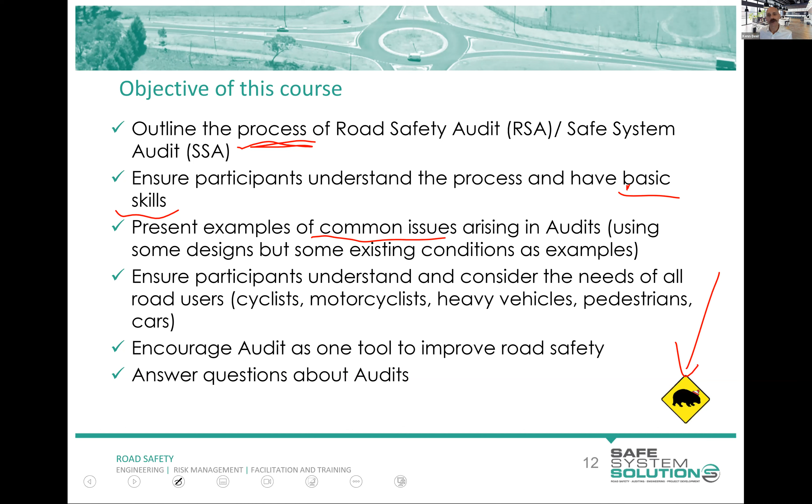Okay, if you are slightly confused about what's going on in New Zealand associated with road safety audit and safe system assessment, I don't blame you. It is a transition phase, as Kathy mentioned. We are seeing a whole lot of new stuff coming online, people still doing old road safety audits, some jumping into safe system audits, some doing safe system assessments - we've got a whole lot of different things going on.

Let me explain this diagram to start. Austroads, and many of you know Austroads, is the body which has all of the different road authorities from Australia and New Zealand as members, or the state and national road authorities, and tries to incorporate local government as well. Austroads has the Austroads Guide to Road Safety, and part 6 of that is road safety audit.

Now, I was technical advisor to Austroads on that document, and lots of people worked on it. It was updated and released in 2022.

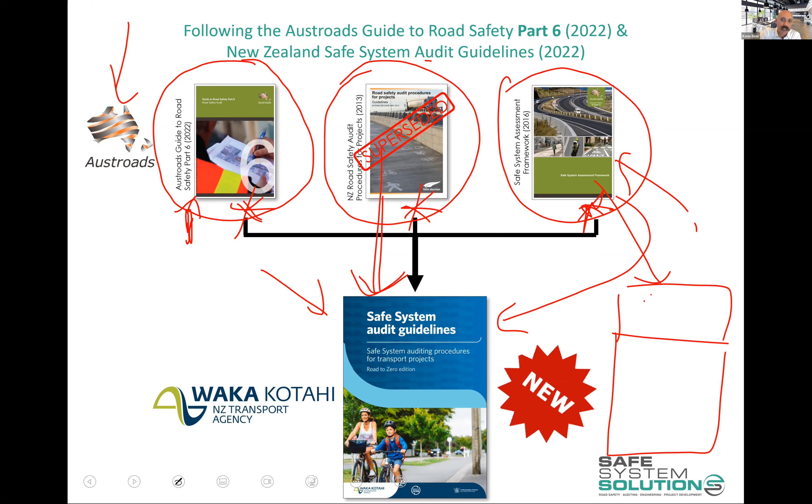Now, that may have clarified things, or it might have made things less clear for you. But what I will be taking you through is the process set out in the Safe System Audit Guidelines. You will get to the end of this and you will be able to do a safe system audit, except you will probably need some more learning around the first aspect - the safe system assessment part - and then the road safety audit part.

You'll be absolutely clear on that audit part. You'll get a few insights on the assessment part too, but that one's probably where you'll need to do some more reading, or do the safe system assessment course, or have a go at it and learn over time, or partner up with somebody who has experience with that process.

So please put your questions in if you're still confused about that - I don't blame you. It is now the New Zealand process that you should be using the Safe System Audit Guidelines; you should be following that process. Waka Kotahi has put their hand up and said these are out, these are to be used, but we do want feedback on where it doesn't work and things we could possibly change. They do intend to release an updated version based on industry feedback.

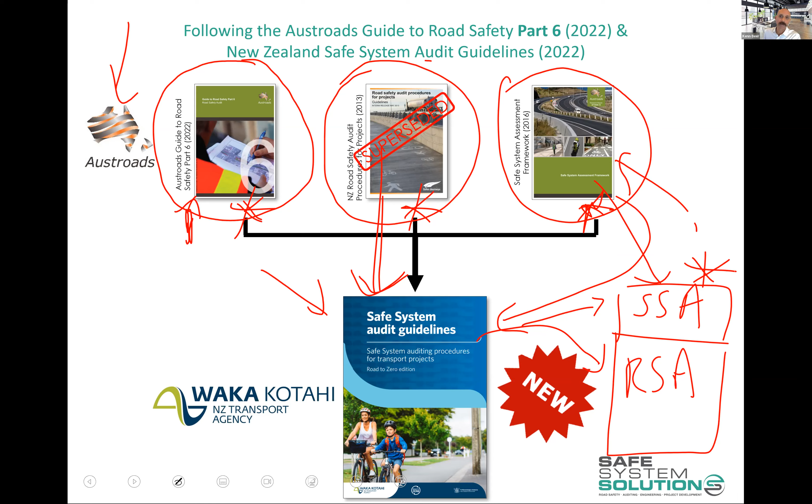Just quickly show this diagram, which is out of the Austroads Guide to Road Safety Part 6. This is just context setting, so don't get overly concerned about the complexities here. We have safety visions of a road network, and things like safe system principles, movement and place or one network framework stuff, general speed zoning and road stereotypes and the like.

Then we sort of have proactive treatments and reactive treatments or techniques. Road safety audit fits in that proactive technique section. So what we mean by proactive is we don't need to wait for crashes to happen to identify risk on the road network, or in a design, or something that's about to be built.

We can use our knowledge to identify risks before people are killed or seriously injured and try to get those out of the road system or out of the design so they're never built in the first place. Reactive treatments happen when crashes have already occurred. With a crash reduction study or black spot study, you've got a lot of crashes at a location, you analyze them in detail looking for patterns, and then look for treatments. These are different processes - one predicts crashes, the other looks at crashes that have already happened.

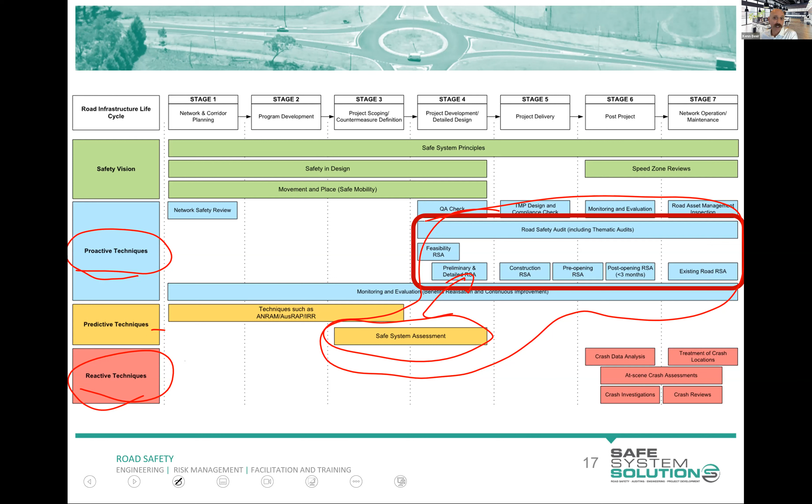I want to stress this point: a road safety audit is not a way you go and look at an area with a lot of crashes - that's a crash reduction study or black spot investigation. A road safety audit is slightly different. The biggest misconception is that because it's called an 'audit', people think it's a rigorous compliance check against standards. That is not what a road safety audit is.

Standards, guidelines and documented processes are a good starting point for any road design or upgrade, absolutely - they have a lot of thinking and safety embedded in them. But simply following standards does not guarantee safety. There are roads out there built to standard where people have been killed and seriously injured. That could be because the standard of the time had risk built into it, because the combination of standards working together creates an unsafe scenario - in isolation they might be okay, but combined they don't work - or because the specific context of the area was never considered when the standard was developed.

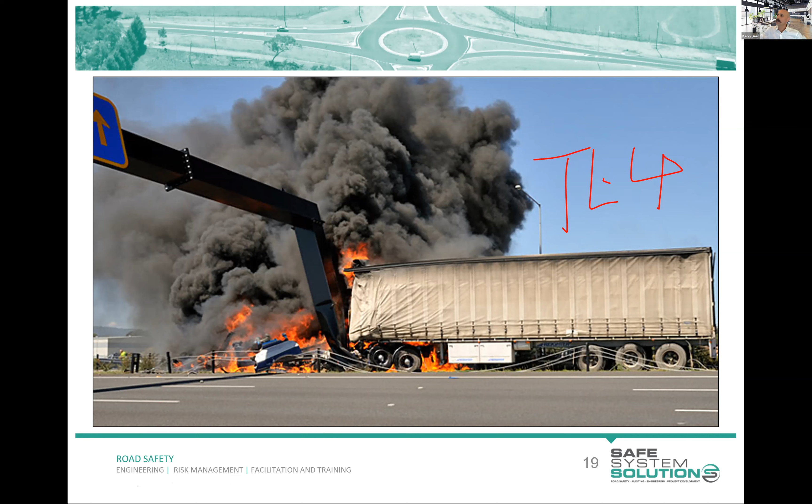The question is: can you show an example where standards have been followed that led to unsafe results? Yep, I've got a couple I'm going through - this is one. As we get a few answers in, there are times when following standards actually increases risk in that context.

This one I wouldn't say increases risk. It's just not doing the job that it could be doing. It's not as effective as it could be. Those standards are just not effective. And the result has come through.

Pretty much a brand new, multi-billion-dollar road has opened, and then somebody's killed fairly recently after it opens. Imagine if that was a rail line and it opened, and within a few months somebody was killed - the line would be shut down, and there would be major overhauls in safety. But that's sort of not necessarily how we look at roads at this stage. We're trying to change that.

Right, do we have any guesses? We had everything from about 2 tons up to about 10 ton. Well, whoever said 10 ton, they can have a prize. I'm tempted to give 8 tons a prize as well. Let's give out 2 prizes.

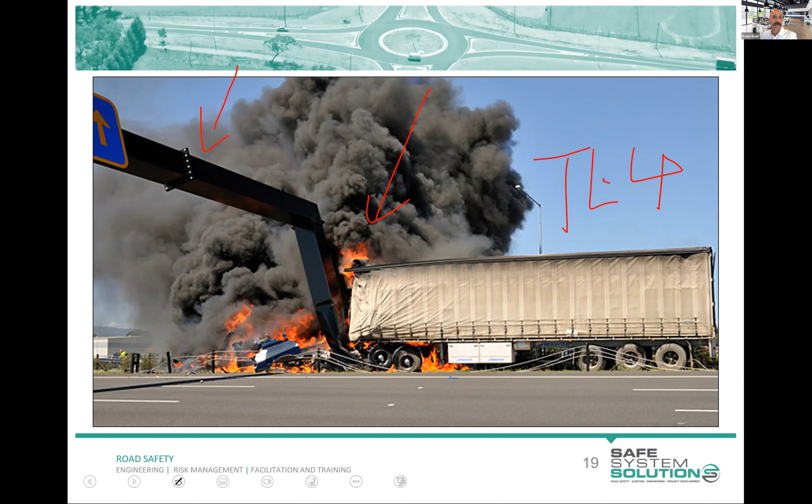So that's actually the vehicle, and that's the test. It's a 100 kilometers per hour, 25-degree impact. And that's what it would contain. So we're giving out a couple of prizes there.

Any other questions at this stage, Kathy? Tell us about the crash angle.

Well, there's some simple physics around the energy of a crash, and the test protocol, as I said, there is either 25 degrees or 20 degrees angle crashes. And your energy that will be imparted on the barrier system is the product of the weight, the speed, and the angle. Those are set, and then you crash the vehicle. So again, if you've got a barrier system and you predict vehicles will hit it at angles far greater than 25 degrees, in a lot of the crash scenarios you're predicting, you might need to think about upping your test level or changing something else.

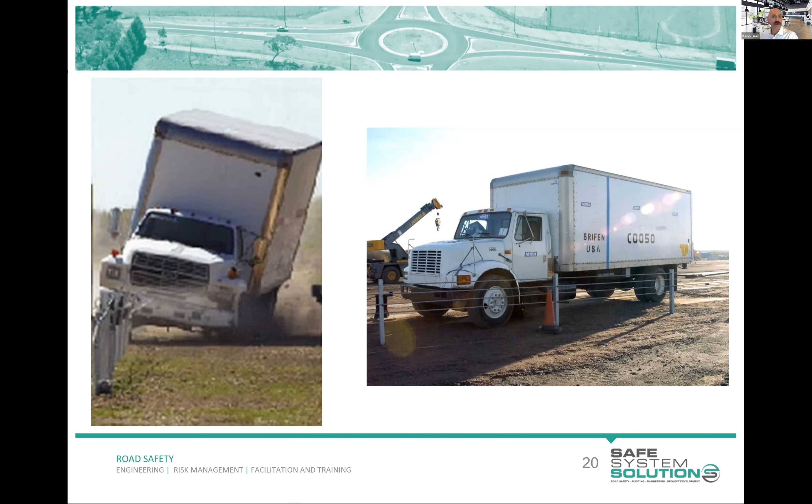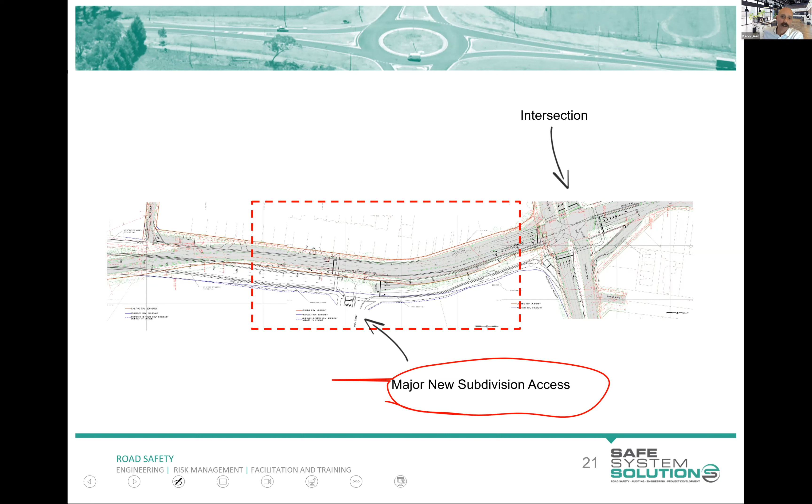That's a good point. Let me give another example of where standards are met and we still see some challenges. So this one is not an existing road, this is a design - I will zoom in on it in a sec. What we've got here is this major new subdivision happening down here, and this is massive stuff. It's got a shopping centre and hundreds and hundreds of apartments and other townhouses and cafes and the like. It's big. And so they are creating a new intersection here with traffic signals to access into this new development. And there's a duplication of this existing road happening as well.

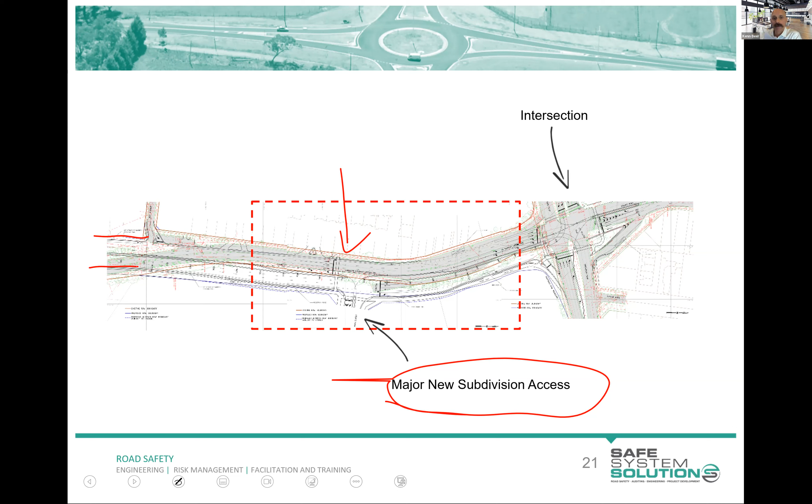So let's zoom in a bit here. And we're looking at, this is where the new access is, Main Street, they've labelled it there. Now I'll put a little red square up here, and this is a vehicle, okay? So we're imagining being in this vehicle, and we're travelling along at, it's a 60-kilometre speed zone, so maybe going 65 or something. And we travel along here, and oh, whoa, we're in a turn lane.

Okay, this is what we call a trap lane. Kathy, we should work out who named it a trap lane back in the day and give them a prize, because that's just beautiful naming of an issue, because it's exactly what you find yourself - you're trapped. And then we know, all right, we know absolutely that we will have rear end crashes and we will have side swipe crashes. And that's because the driver of this vehicle will realize this at some point, and then they will try to change lanes into other vehicles. They will not realize it, and then this vehicle will stop abruptly in front of them. And we know we have road safety challenges here.

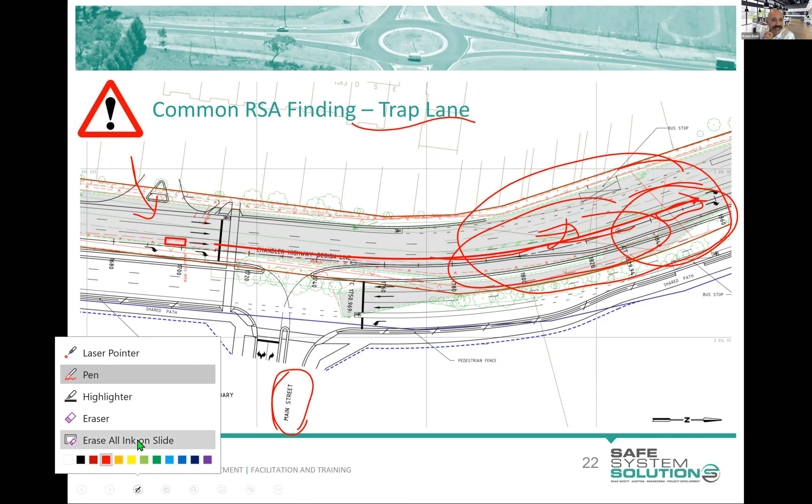Now, a trap lane is one of these interesting ones where it is discouraged in road design, but this meets standards, okay? So again, this is where we can be injecting and saying, hey, you're creating a trap lane, you plan to build a trap lane, this is going to cause trouble. And then giving them some ideas on how they can rectify this.

Now, as a road safety auditor, some of you are probably road designers or people who have been involved in this sort of stuff, and you know the challenges that are faced here. You don't need to know this site to know what they're probably dealing with. They're probably dealing with land acquisition challenges, services, potentially cultural heritage, environmental challenges, traffic flow modeling challenges, right? It is not easy to design and build something like this. You've got so many constraints on it.

As a road safety auditor, we have this luxury that we are only concerned about safety. That's what we're here to do, okay? And that's one of the reasons we don't let the designer undertake a road safety audit of their own job - it's one of the reasons. Because they've got too much going on, too much to think about, too many competing demands and challenges and things that they're trying to design in and out and think about. We come in, complete focus on safety, and present those issues that we think could present death or serious injury to our community. And then we try to help them a little bit with ways that they could lessen that.

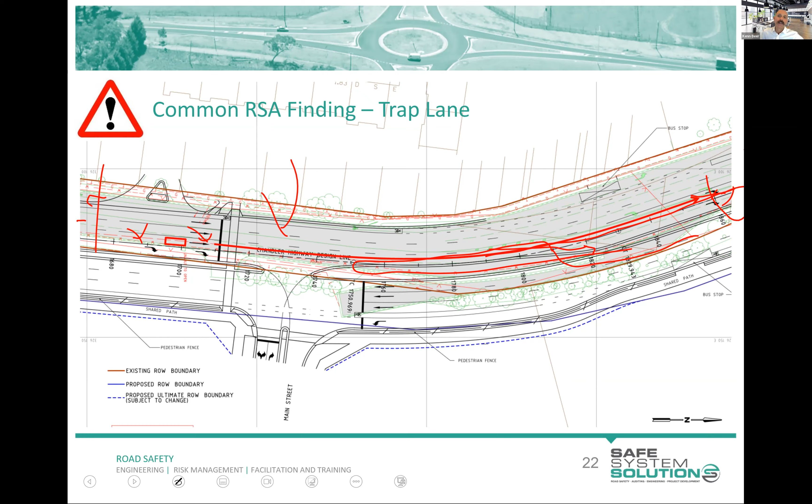I'm going to play this little video, and I might have to duck out of this screen and play another because I don't think my videos are playing in PowerPoint at the moment. Just checking if it does... no, it's not going to play. Okay, I'm going to stop sharing and share another screen.

Any other questions come up there, Kathy? No questions, Ken. I wish you did have legislative powers though, to get rid of that trap lane—that would have been good. Maybe next time.

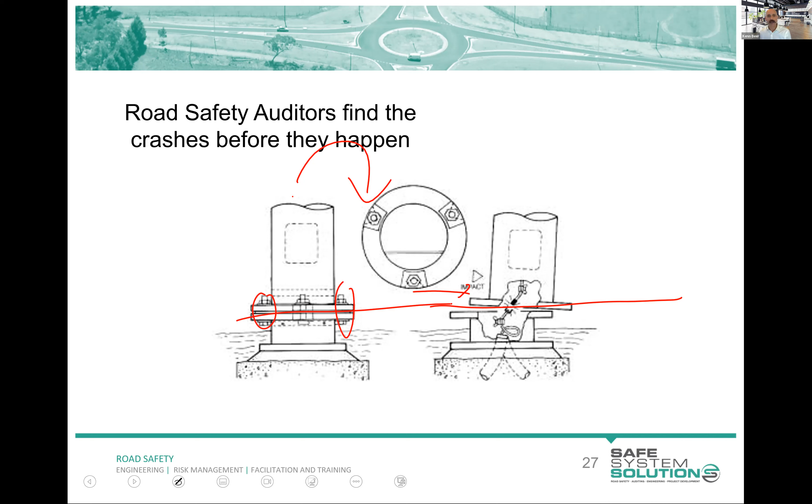A slip-base pole is an amazing bit of road safety engineering. For those who don't know it, essentially you have a collar and a shear plane on the bottom of the light pole. You can see when impacted from the side, it shears. When you've got your torque, the weight and the wind, it's going to lean on the bolts, but they'll shear off on impact. Just brilliant engineering.

Here's one up near New Plymouth. You can see that the speed of a vehicle must have hit this slip-base light pole to pierce through a reassurance sign. No injuries. So you could imagine if that was a rigid light pole, it would have destroyed the vehicle and the occupants. So that's slip-based.

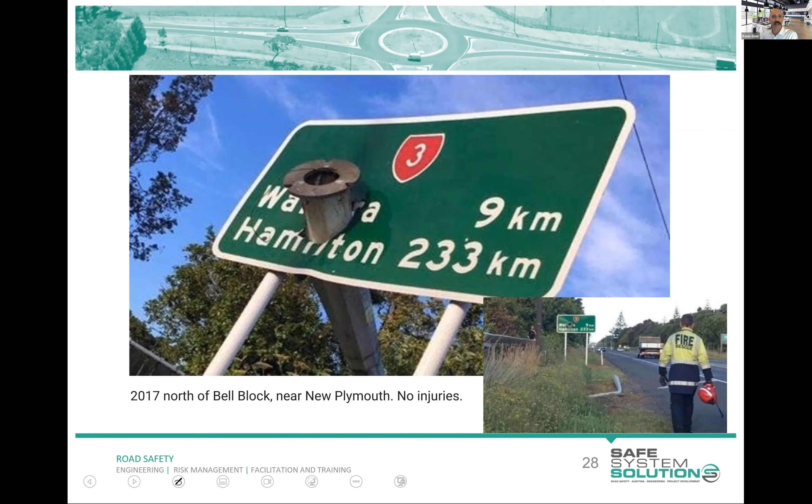There is another type, and I don't expect too many people to know this. I'll ask that question in a second. But as a road safety auditor, or a safe system auditor, you're going to be given things like this in amongst a big design set. Your job is to look at that, read through all the little bits and pieces, and say, okay, they're putting in new lighting, which means there'll be new light poles. What type of light poles are they using? Are they going to be slip-based? Are they going to be rigid? I'm worried about vehicles leaving the road and hitting those.

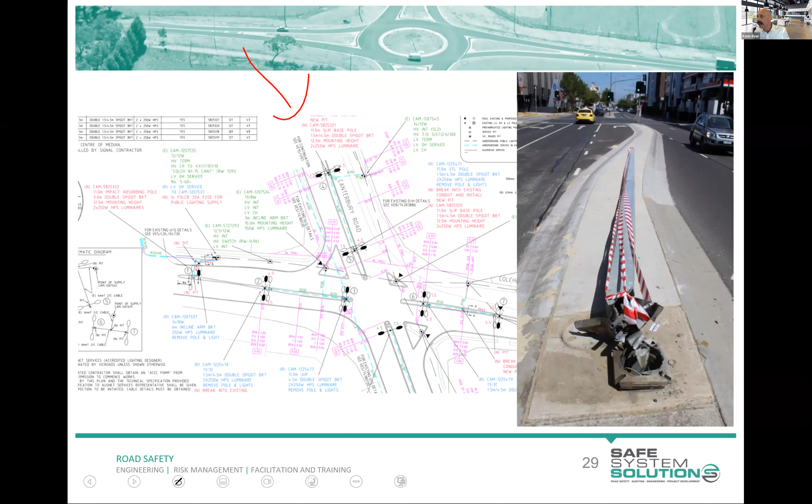Now let's have a look at this little bit of road environment. What if they decided to put slip-based poles at these locations? Is that a good idea? These ones all slip-based? We also need to think about where they may fall. We know these break away and fall. That's what they're designed to do.

But again, you need to contextualize this. This is where standards and guidelines tell you generally where to put these, but you can often meet standards by putting slip-based poles in or rigid poles in, and in context it becomes a danger. So there is another type of pole categorized as frangible, and I'll give a prize for this, but I don't expect anybody to come up with the answer because it's a bit specific. Does anybody know the other type of pole? I said slip-based poles, and then we've got rigid poles, which aren't designed to break away, they're just rigid. Anybody know the other one?

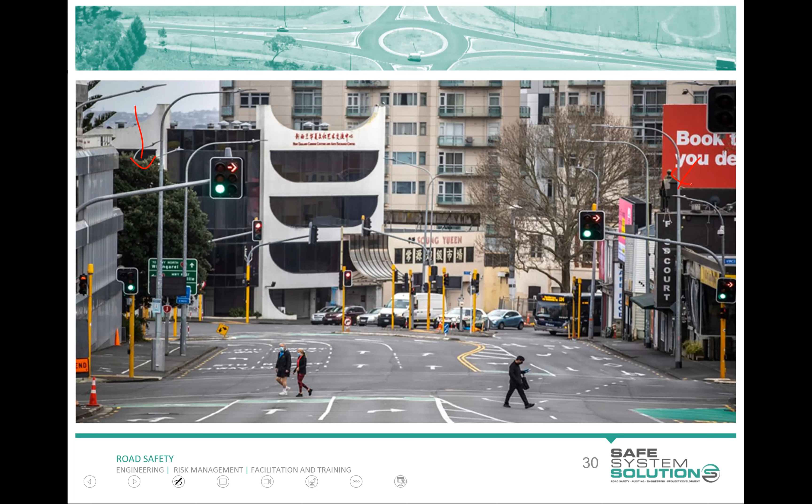Did you secretly mutter it there, Ken, accidentally? I don't think I did. There's a picture of it. That's all right, Jubin got it. Is it frangible? No, oh my mistake. No, I've been saying frangible quite a bit because frangible is the overarching term. Loving the guesses coming through - collapsible, ground planted, crumple - these are good. They're all crumple and collapsible, very good. Impact absorbing - nice. The principle that everybody's saying, crumple, collapsible, dampening, you're all sort of right.

It just happens to be called an impact absorbing pole. It sort of does what people are saying. It doesn't split, doesn't shear at the base, and it's designed to deform and contain around them. The reason I labour on about this specific one is that it's quite a common road safety audit finding that the choice of the type of pole is important. Sorry, I've gone back, so that's still the same Wally - don't add more Wallies because I've gone back a slide.

There's a rule of thumb. Low speed environments, you're either going to use an impact absorbing or a rigid pole, usually because you're worried about pedestrians, power lines, other things in these low speed contained environments. The energy means you can contain it around the vehicle, or if they hit a rigid pole, it's not going to be enough energy to seriously injure or kill the driver. But use slip-based poles in higher speed environments.

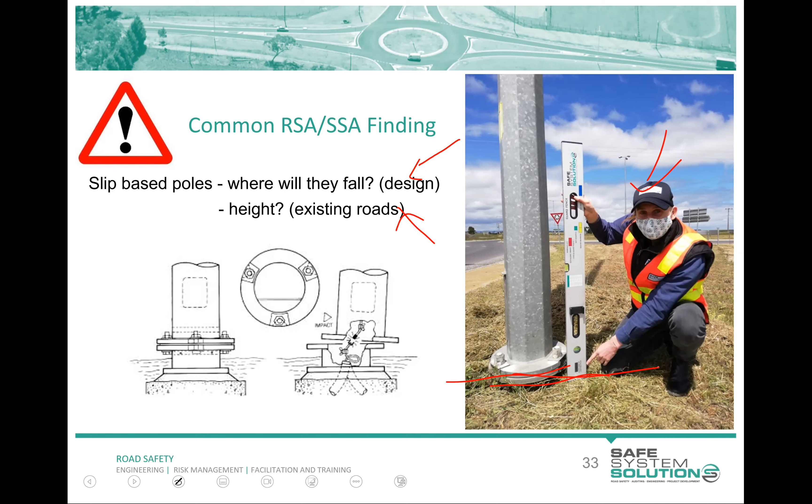In terms of where vulnerable road users would be, impact absorbing poles would be good. This is a bit of a balance, and you don't get direct guidance in standards or guidelines. It needs to be a judgment based on the context. In an inner city environment, no, I'd make sure vehicle speeds are low, using local area traffic management, and I'd use rigid poles.

In an outer environment where speeds are high, I'm going to use slip-based poles because the danger to the vehicle occupants is probably the big one. And any areas where there are pedestrians, I want lower speeds.

In these sort of mid environments is where these work. They generally contain within a tighter envelope than a slip-based pole. They do still come down, but they contain closer within the vehicle. There's still a chance somebody in the vicinity might get hit, but it's a tighter vicinity than a slip-based pole.

We saw one catapulted through a reassurance sign up near New Plymouth there.

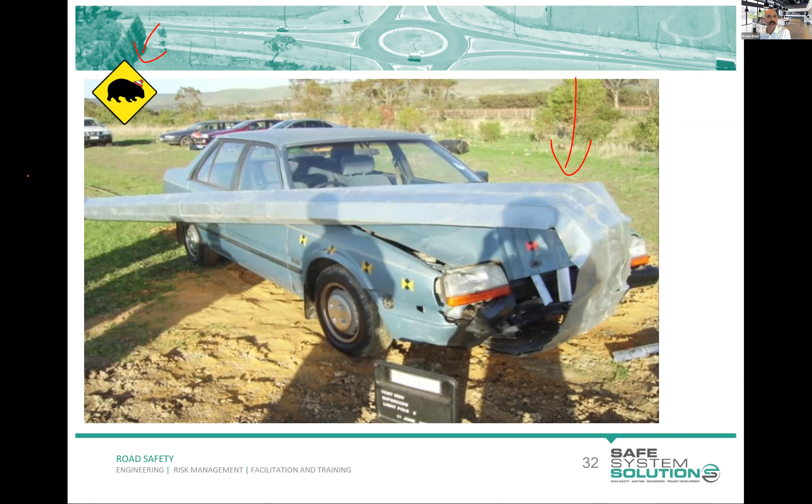I think I've stressed this a lot: road safety audit is proactive, a black spot or crash reduction study is the reactive one. Should you look at crash history as part of a road safety audit or safe system audit? The answer is up to you, there's no specifics on that. I've worked with auditors that do and auditors that refuse to, and that's all fine. The thing is the crash history should not drive your assessment and your audit. The fact that there may not be crashes at a location doesn't mean risk doesn't exist there. The fact that there are crashes there may not reflect what you think will happen in the future.

A lot of safe system auditing and road safety auditing is done on designs, and some people will argue the crash history is irrelevant because the whole scheme is changing. If you've got a give-way controlled intersection and they're building a roundabout and you're asked to do the road safety audit or safe system audit of the roundabout, what's the point of the crash history? You're changing the whole form of this intersection. That's what you're asked to do when it's a roundabout.

Will anybody be killed or seriously injured then? That's your role. Have they thought about pedestrians crossing? Have they thought about cyclists getting through that area? Is it clear that a roundabout is coming up? Are the crossfalls good? Are we going to have heavy vehicles rolling over? Those are the kind of things you want to check. You're not going to get that from the crash history, are you, because it's not a roundabout at the moment.

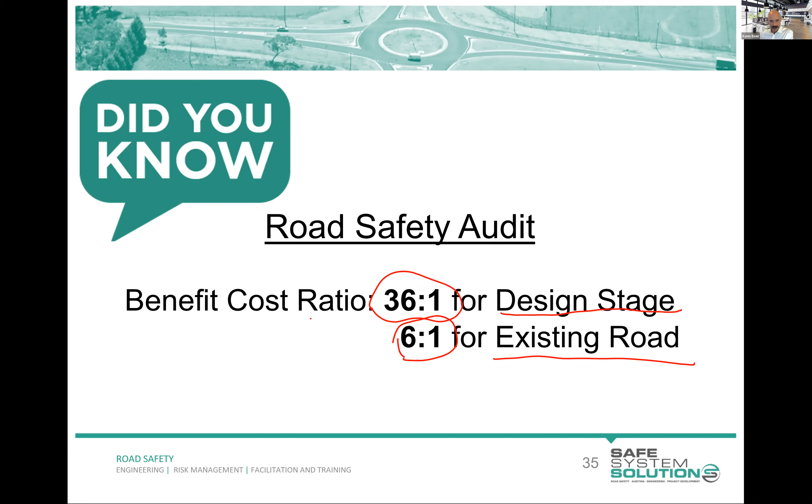You've won a prize for that. Yeah, that's right, changing lines on paper or in CAD is a lot cheaper than getting out there and physically altering the infrastructure. Now sometimes the changes in design have more costs associated with them, sometimes not, sometimes you save money. But in general that's why we see this massive benefit - because nothing's been built yet, and then you can build it safer, as opposed to it's there and, oh, we've got to alter this. So it looks like a few people getting in on that. Kathy, you might have to run out of prizes in this course, Kathy. They're pretty good, I'm going to do an Oprah - everyone gets a prize. No, don't do that yet. Okay.

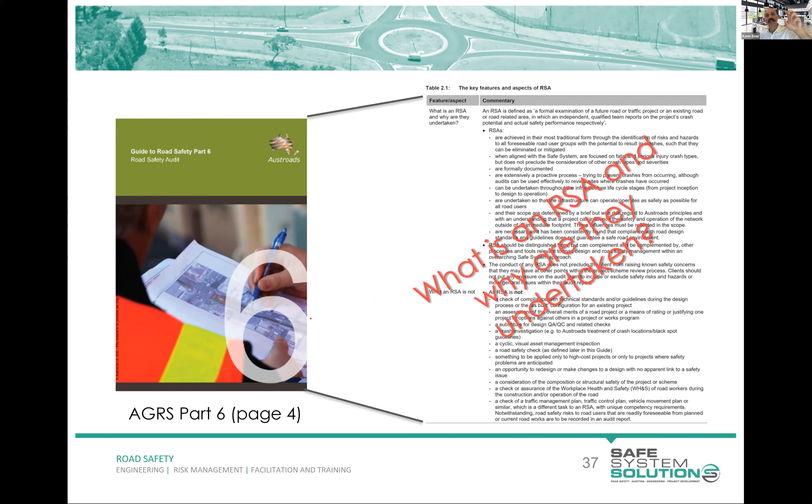So what is a road safety audit? I'm going to talk about road safety audit, and then I'm going to talk about safe system audit. As I say, they're sort of similar, same. I'm not going to read through the full page of text in the Austroads Guide to Road Safety Part 6 - it defines what a road safety audit is, lots of dot points and all of that. You can look at that yourself, it's in the learning management system, you've got a copy of Part 6 in there, you can have a read of it.

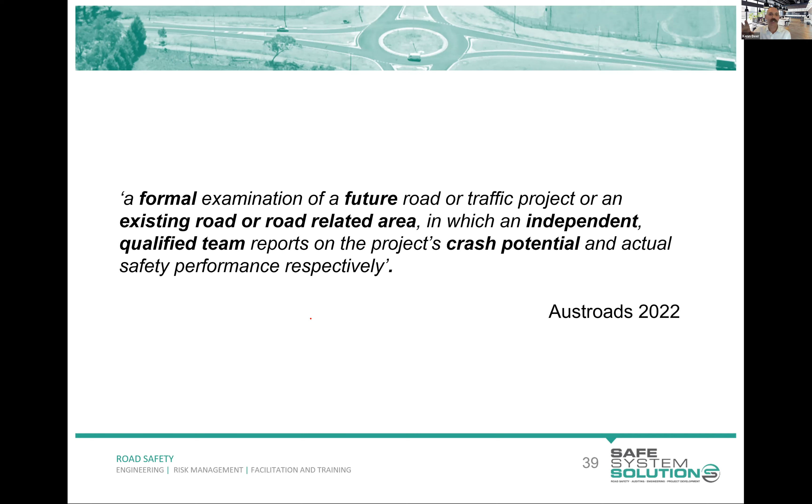A key paragraph out of that is: a road safety audit is a formal examination of a future road or traffic project, or an existing road or road-related area, in which an independent qualified team reports on the project's crash potential and actual safety performance respectively. Formal - audits are formal. This is not a quick check, not something you just get thrown somebody's design and give it back to them in an hour with your road safety audit. No, that's not a road safety audit. There's a formal process to follow, and I'll take you through that.

So you can do it for future or existing - designs or existing roads or road-related areas, shared paths or car parks or the like. You have to be independent. I said you can't be the designer, you can't be the project manager, you can't be the developer - you're compromised in terms of your independence if you're any of those sorts of things.

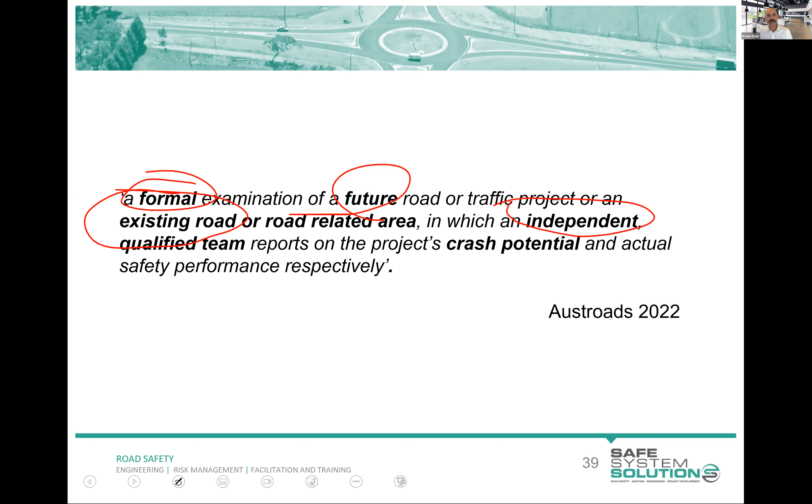You have to be independent because, first of all, you can't proofread your own work. You try to, you write a letter and you read it, and you go, yep, it's perfect, and you hand it to a colleague and they read it and come back with all the errors, and you go, how did I miss that? It's because your mind's too much into it and you can't see those things. So that's one reason. I talked about all of those other issues - project managers have cost issues, timeline issues, they've got services, and angry residents, and all of this. It can just alter the way they potentially see safety, not overtly and not consciously sometimes, but there are a couple of reasons.

Qualified - you've got to really have done a course like this, you've got to understand the process, and we're thinking about crash potential.

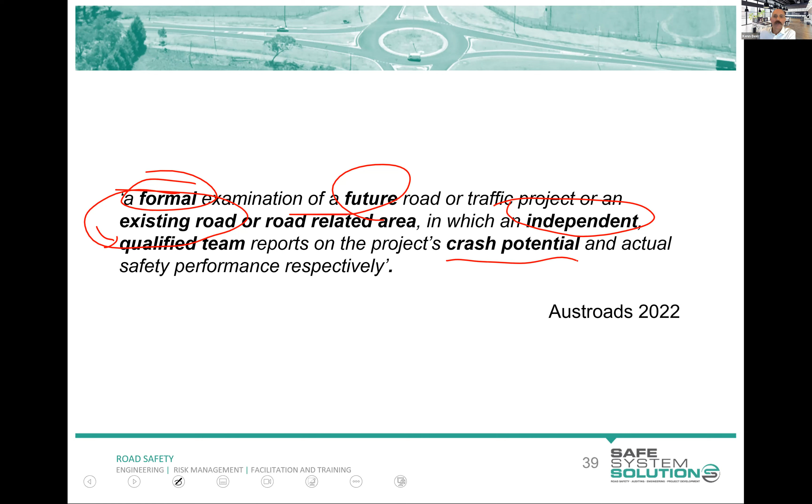So the safe system audit are new guidelines released by Waka Kotahi. A lot of the same stuff here. Their definition of safe system audit: formal, still formal, robust technical assessment - we've got to do some technical assessing - of road safety risks associated with transport improvement renewal projects that are completed by independent and qualified audit teams. They consider the safety of all people, reinforcing that this is for everybody - not just cars, not just trucks, not just bikes, this is everybody.

Completed by applying safe system principles. You ensure that the design and network operates as safely as practicable by eliminating fatal and serious potential. It's intended to support the delivery of a safe system and is not a review of compliance with standards. They even spell that out really clear.

What is the safe system? If you are in industry in New Zealand and you have not heard of the safe system, you've been living a little bit under a rock there, but I'm going to very briefly talk about it.

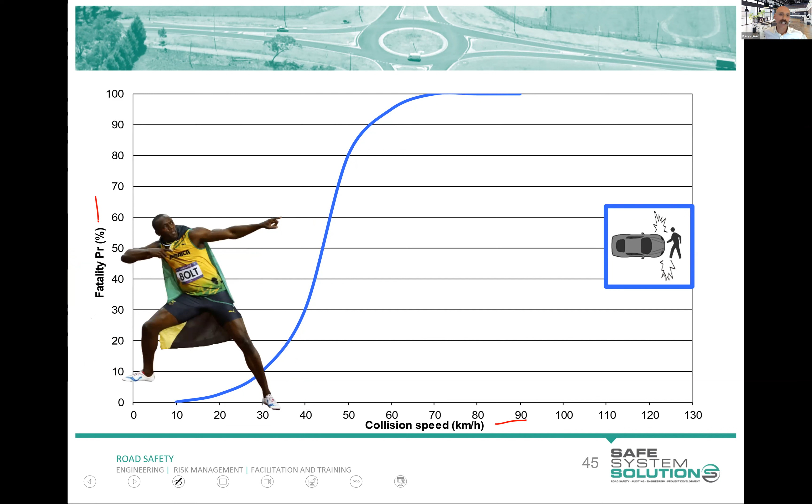And the blue line there is like our whole community, so that's Usain Bolt as a specific one. But generally, in that 10 to 20 to 30 kilometre per hour range, people survive when their car strikes the pedestrian. Up around 60, 50, 60, 70, they're usually killed on the direct strike.

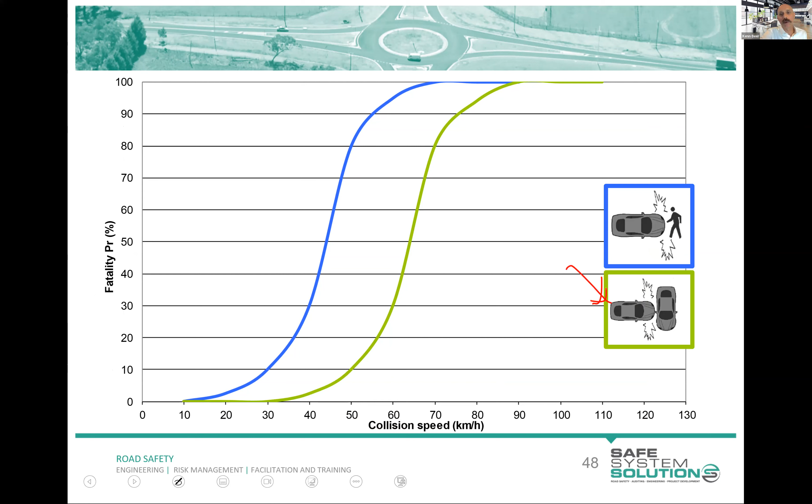I'll jump through that because it's not working. Side impact crashes - this is the bullet vehicle, that's the one that does the damage, the bullet vehicle. Target vehicle here, bullet vehicle speed down here, and target vehicle occupant death, right?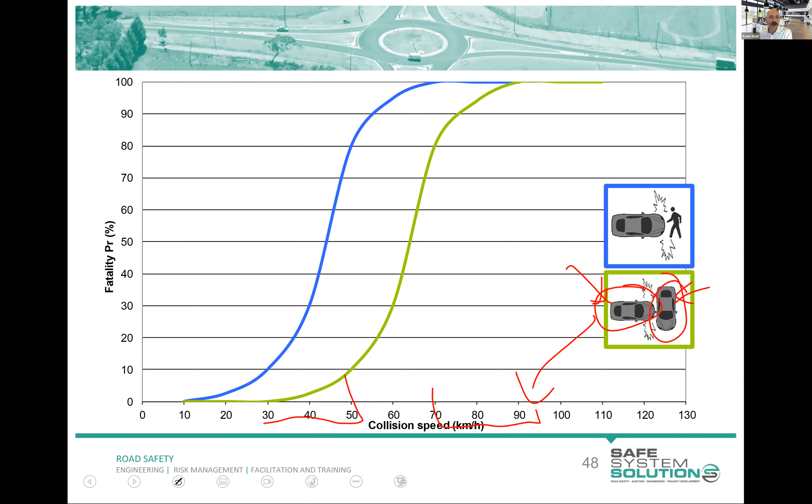At 30, 40, 50 kilometers per hour, generally survivable, sort of; at 70, 80 and up, it's highly likely that the occupant of the target vehicle struck by a bullet vehicle at that speed at a 90-degree angle will result in death. And head-on crashes, we see that sort of 60, 70 kilometers per hour is generally somewhat survivable, and up around 90, 100, 110 is likely to result in death. That's the speed of each vehicle.

So what we do is draw this line here around that 10%. The reason it's there is because this is where we have an exponential kick up - things go really bad really quick after this point. We're very interested in those specific speeds, 30, 50, 70, and they're called the safe system threshold speeds for those particular crash types. I've put those in a slide for you with some extra ones, and I'll continue to provide information about crash type and the speed we think is that threshold where things go really bad in small increments after this speed.

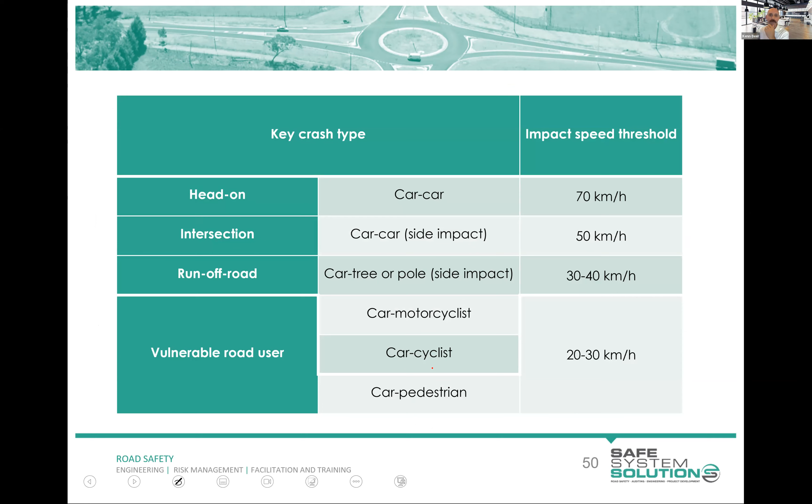And the old model for a road safety audit used to be that we look at a design or an existing road, we identify the issue, we give it a risk rating, and then we recommend some treatments.

The new safe system assessment model in New Zealand starts off with a safe system assessment matrix. I'm not going to give you all the details of how to do this, but you need to know that if you're part of a safe system audit team now, you're going to be working with somebody who's done the safe system assessment course and can pull together this matrix and help you with that, or you've got to have a bit of a go at that yourself. It's not the focus of this course.

The focus of this course is sort of from here down. You still identify issues, you rate those issues, but you're thinking about those biomechanics of injury that I just talked about. You make treatment recommendations, and then you categorize those treatments, because as Kathy was asking those questions, like signs and lines - well, is that going to be as effective as a roundabout? No, it's not. Or changing the whole geometry of that intersection. So we need to help by not just saying here's some treatments you could do, but here's how effective they will be, and categorize it.

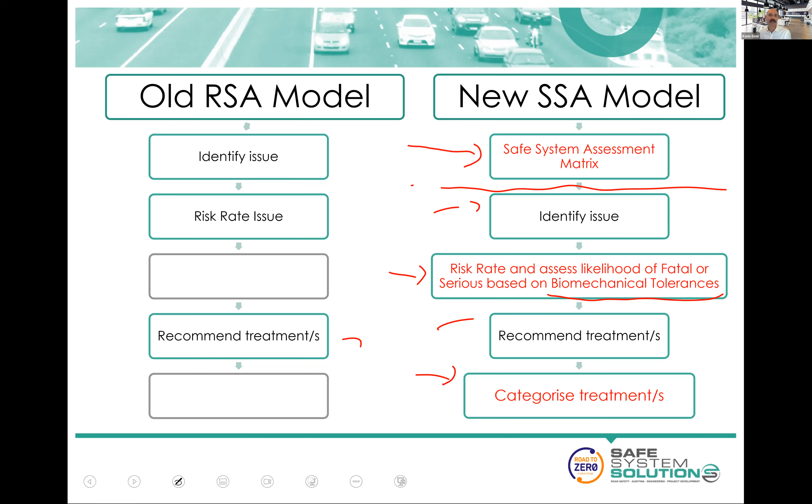Now, the easiest way for me to do this is just to walk you through an example of a finding and writing it up.

Okay, here's a new intersection plan. This is not built, this is not there, there's nothing there at the moment. Well, there's a road, but there's no intersection. They're planning to build a new intersection. Here it is, I've designed it up.

Looking pretty good. So the thing that I'm interested in as a road safety auditor here is predicting, well, I wonder what will happen with death and serious injury. How can this occur? One particular issue I'm concerned about here is a vehicle turning here, maybe a large vehicle, somebody waiting here to go, and that blocking sight lines of a vehicle that's coming along here.

Okay, called a dynamic visual obstruction. Dynamic, because it's moving or can move, and visual obstruction. So dynamic sightline issue, but call it dynamic visual obstruction.

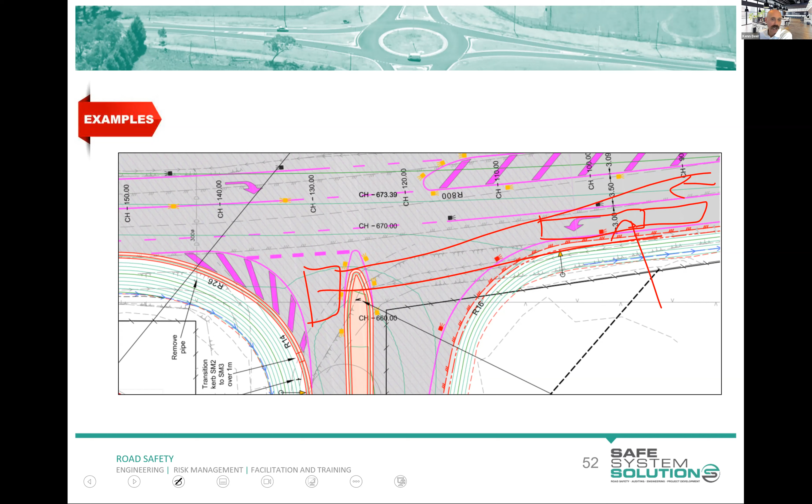Okay, this is not the same site, right? I just know that this is an issue. So I was able to look at this design and say, oh yeah, they're going to have a dynamic visual obstruction issue. If they build it exactly like that, that will be an issue. And there's potential we see some of our community killed or seriously injured because of it. So we write that up.

We say, okay, for the intersection of blah, blah, blah, blah, blah, blah, the vehicle turning left may create a dynamic visual obstruction of motorists at the hold line, and some information about why this is an issue and the risks it causes.

Elaborating a bit about the volume of vehicles, increasing risk, and a little statement here at the end, which is interesting: the design is consistent with current Austroads and VicRoads - this was done in Victoria, VicRoads design guidance - the auditors believe it still presents a safety issue. So there you go, the audit team has squarely said, hey, we know this meets standards, but it's an issue.

Okay, I'm going to break this up for you. And this has taken me - I've been running road safety auditing for about 15 or 17 years - and only in the last few years have I actually worked out this formula to make people's life easier.

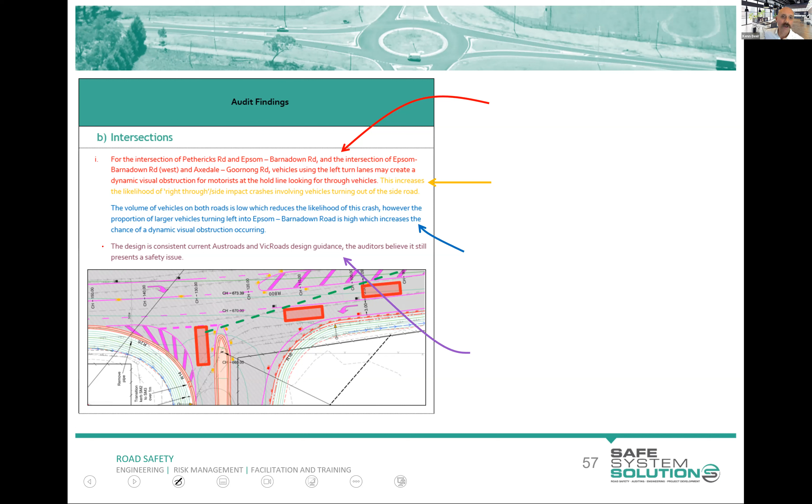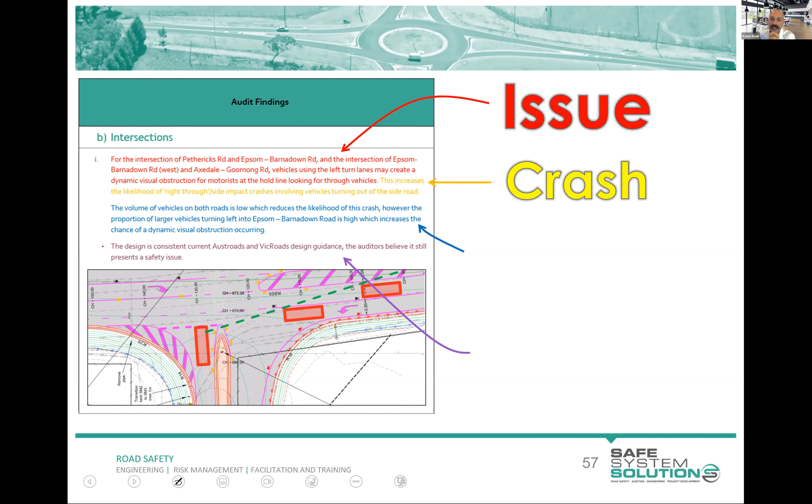The first thing you want to do when you write up the finding is to articulate the issue, so you're explaining that issue. Then you need to specify the crash. It does not matter how obvious it is, you need to say exactly what the crash is. So this one we see, this increases the likelihood of right through side impact crashes involving vehicles turning out of the side road. Okay, you just got to say it.

Then you talk about risk factors, anything that's going to increase the risk, decrease the risk. So in this one, we're talking about the volume of heavy vehicles turning left, the low volumes on the road. Okay, and then we say any standards or guidelines if applicable.

Now this slide here will help you no end in your assignments and your future auditing for that matter. But you want to get good marks in this course, take note of this slide, because our markers will be looking at your findings and saying: have they explained the issue? Have they articulated a particular crash? Have they given us any factors that increase or decrease risk? And have they given us any standards or guidelines if they were applicable?

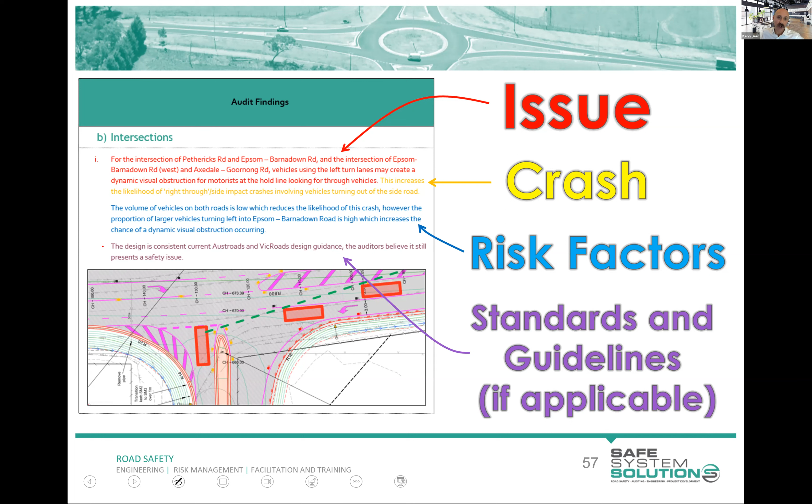Okay, so risk equals like the chance of a crash multiplied by how bad that crash is going to be. So it's talked about sometimes as frequency times severity, or likelihood times consequence, or likelihood times severity, or frequency times consequence, however you want to describe it.

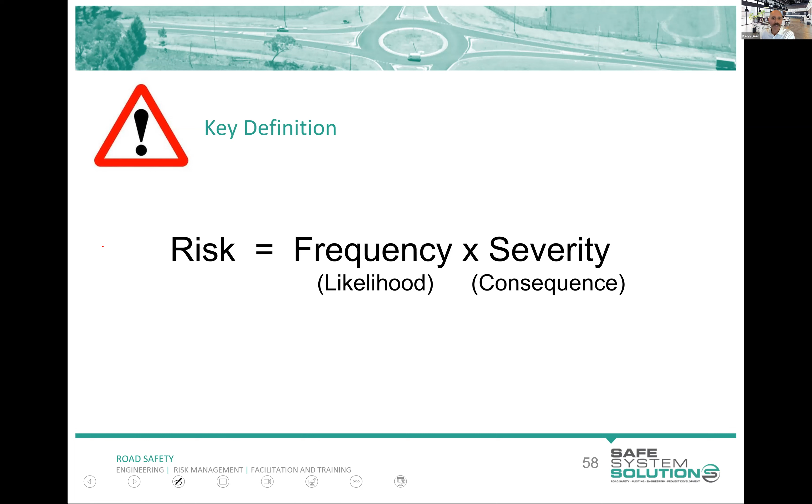In New Zealand, this is the risk matrix. So it's saying, what is the chance of a crash? And that takes into account exposure. For anybody who's now got their head in the exposure, likelihood, severity - this is exposure and likelihood combined. But what is the chance of a crash, and then how bad is it going to be? And you do that - you say, well, I think it's likely that a crash will occur, and I think when it does, it's going to be serious, and so the resulting risk is serious. Or I think it's very unlikely this crash will occur, and if it does occur, it's going to be minor - well, that's a minor risk.

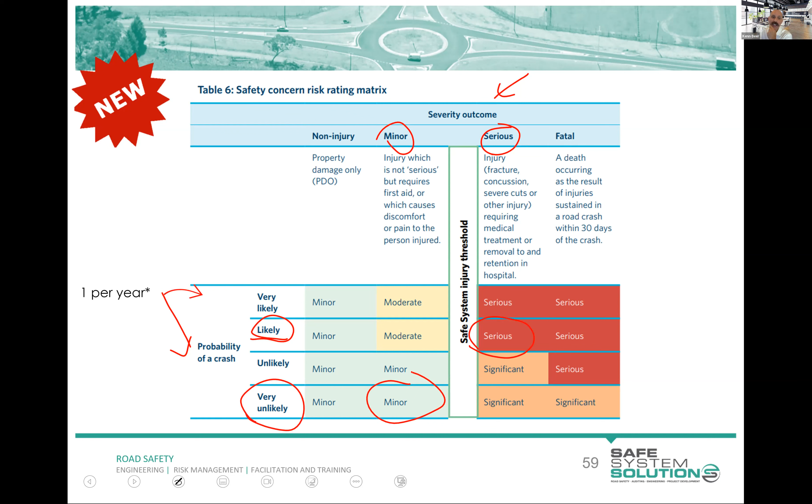Now, in terms of this, there's a little bit of guidance. It's saying very likely, as we're thinking that this crash will occur once a year. Very unlikely, we're thinking sort of once every 10 years or so that this will occur. And that's as much guidance as you get, so there's a bit of judgment involved.

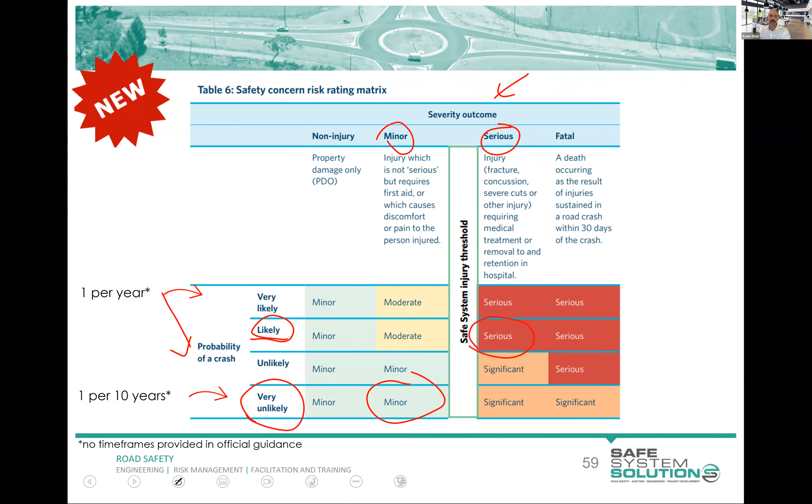Sorry, I did put a disclaimer on that. That is held over from the 2013 New Zealand guidance. It's not specified in the newest Safe System audit guidelines, but you're going to need to make some sort of judgment in your mind, and that's a decent starting point.

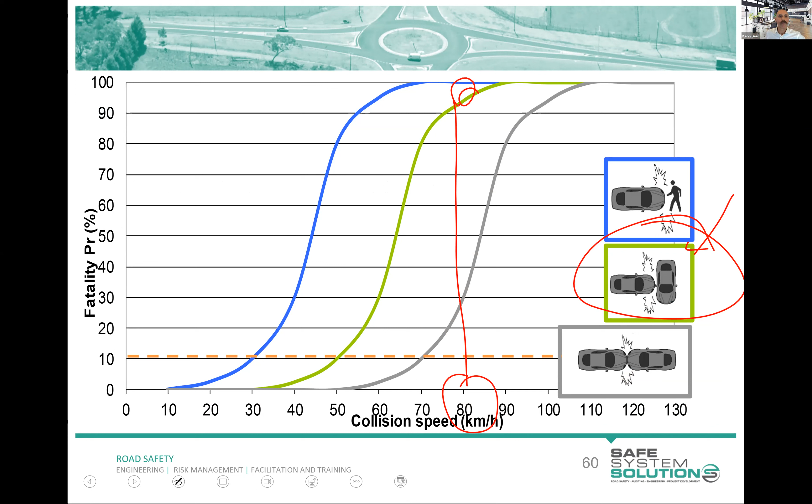So I've put there: very unlikely. Now you might go, well hang on, I've just seen this issue and I can't unsee it, it's now burnt into my brain. But the reason I've gone with very unlikely is that I know there's relatively low volumes on that road, and I know people are generally fairly good at accommodating this in their practices. It takes a very specific alignment of things for this to happen. The issue's there all the time, but actually transpiring to a crash, I think is very unlikely.

And I know that because I've analysed thousands of these sorts of intersections in my time. If you have very high volumes, you'd rate it higher. But looking at deaths and serious injuries, we see maybe one fatal in a 10-year period would be potential in these, and serious injuries around the same. That's the sort of thing you start to get a bit of judgment on.

The severity is going to be bad when it happens, there's no getting around that. This is going to be bad, this is fatal. So we know the risk then is significant. You can see we've coloured it the same there as that one off the risk matrix. So it's clear, this is a significant risk. It sits to the right of what we're calling our safe system threshold, serious injury and fatals, to the right of that. That's just something you know.

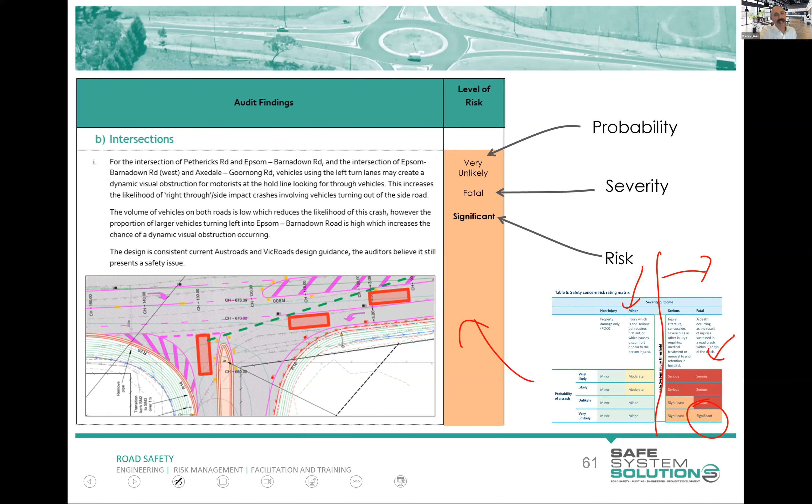So then we need to categorize treatments and say, okay, what can we do about this? What can we suggest that they change? There's lots and lots of things you can do at that intersection, from changing the intersection form to a roundabout or signalizing, to changes in the line marking, changes in the geometry, warning signs, all sorts of things can be done.

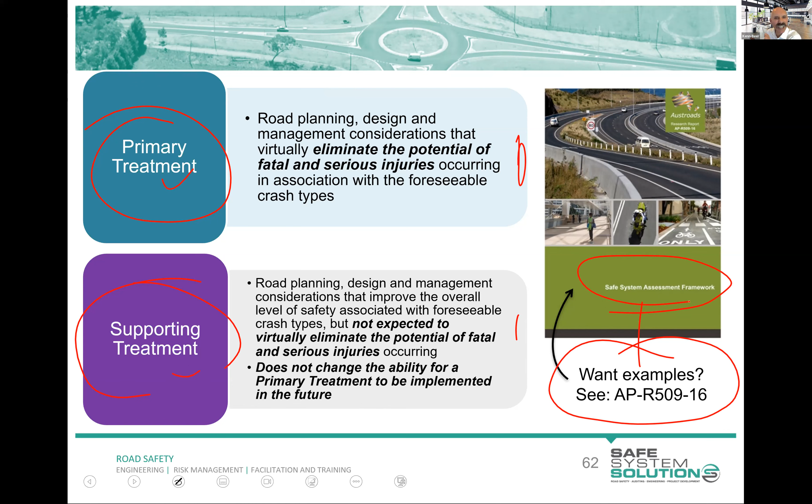We can categorize those into either primary or supporting. Primary being stuff that we say virtually eliminates the potential for fatal and serious injury at that intersection for that crash type. Supporting are things that are good, they're going to improve road safety, but they're not going to virtually eliminate that crash. There's actually lots of examples of what's primary and what's supporting in the safe system assessment framework, but this is probably a part you're going to really struggle with, and we've got a whole section dedicated to this coming up.

So here you can see the recommendations have come in. It says: implement measures to reduce speed and/or angle of impacts at this location. This could be achieved with a roundabout, primary. If this cannot be achieved, implement measures to improve the sight lines at this location, such as increasing the offset of the left turn lane, relocating the hold line forward, provided it can be done safely — both supporting.

Now this is a really important one. The roundabout has been called the primary treatment because we know that we virtually eliminate side impact, vehicle to vehicle death and serious injury if a roundabout was put here.

If we open up sight lines, we will reduce the chance of a side impact, but we don't eliminate the chance of death and serious injury resulting from a side impact. Same with adjusting where hold lines sit.

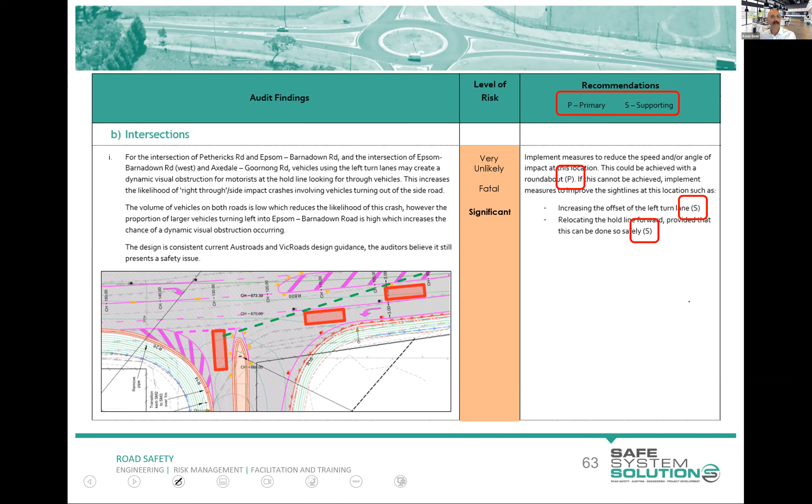So here's an example of a way one of our team helped a region. They put in a buffer, and actually made it a bike lane as well, to address this issue because it opened up the sight lines, so that masking did not occur.

But this is a supporting treatment, okay? The reason it's a supporting treatment, not a primary treatment, is we've eliminated that masking, but it's not about the masking. It's about the crash of a vehicle like that. That can still occur, at speed. We've really lessened the chance of it, but we haven't eliminated that crash type in the energy that is not tolerable.

And just a little tip on that: a primary treatment must either address the consequence of the crash or virtually eliminate the possibility, and that's got to include human error, mistakes, people running red lights, falling asleep, and all of that. We are going to give you a lot of practice at categorizing primary and supporting, so if you're still confused now, don't worry too much.

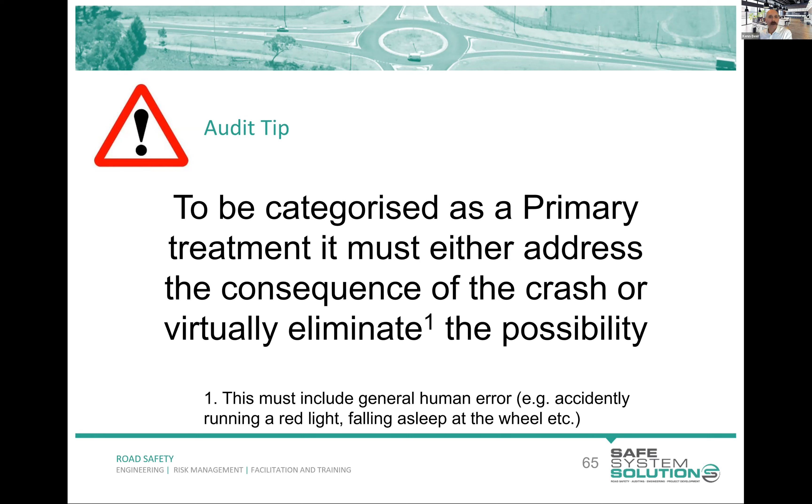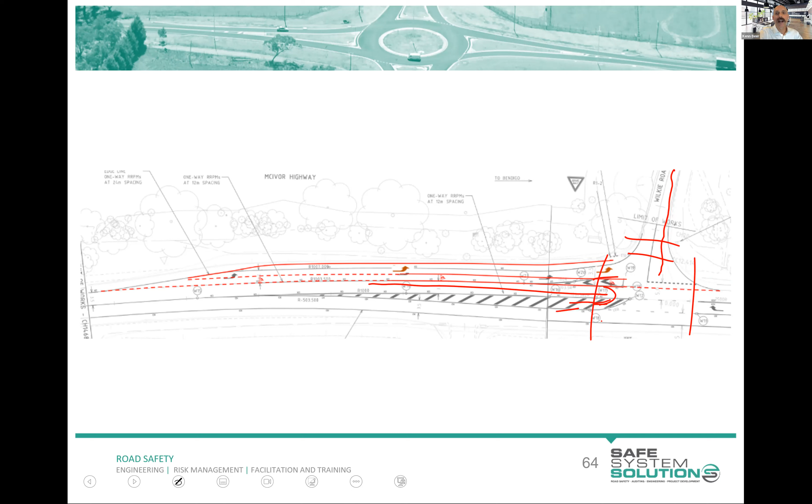But let me go back and clarify this because it's important. If you put a speed hump back here, that's a supporting treatment, it wouldn't do much anyway. Because it's about this vehicle's speed and energy that's doing the killing. You'd need to have your speed hump or raised intersection there, that would slow that vehicle down as it approaches. Then we're into primary territory.

New Zealand has a template - safety audit template, safe system assessment template, and that actually should be SSA because I've put the new template in. It's a Word document and you will use it for some of your assignments later. It's got drop downs, drop down the probability rating, drop down the severity rating, put in the risk resulting from that. It doesn't automatically do that for you - it'd be nice if it did - but you then look it up and select the risk rating.

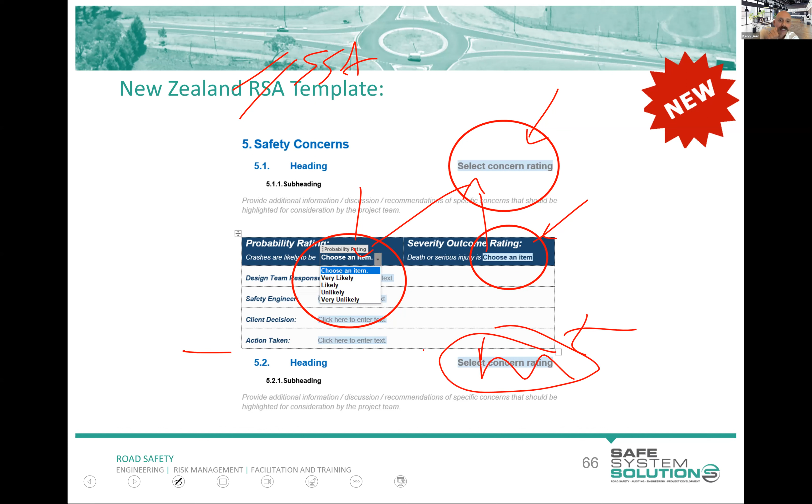Sorry, that's the next finding. That's a finding, and then you've got to write lots of information in there. You'll use that.

So very quickly, another example: right turn bay is too narrow. Well, that doesn't tell us anything as a reader, does it? That's not a good audit finding, or it's a very bad finding in the way it's written up. It might be a good issue they found, but they haven't written it up well. This is better, gives us some more information: from main road to side road is too narrow, increases potential for sideswipe crashes, rear ends, and so on.

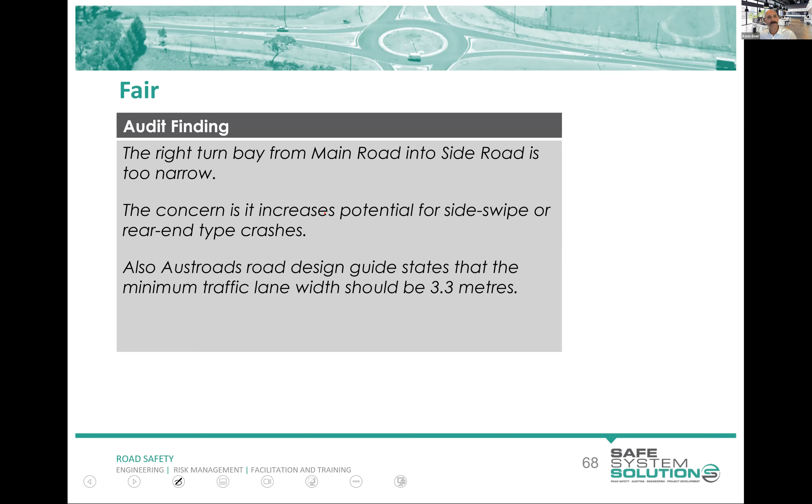This is excellent, and one reason this is excellent is because I got a snip of the design, and without even reading all of this stuff, I can go, oh yeah, 2.9 meter right turn lane - I know which one they're talking about, I know where it is, and I already know the issues. I haven't needed to read this. So that is great.

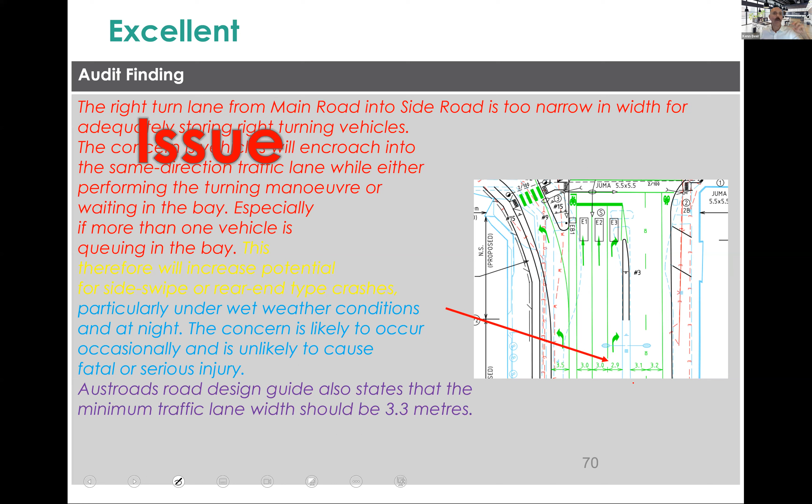And then you can see it's broken down into those segments. What's the issue? What's the crash type? Side swipes and rear ends. What are the risk factors? This is going to be worse in wet weather and dark conditions. And are there standards and guidelines that support this?

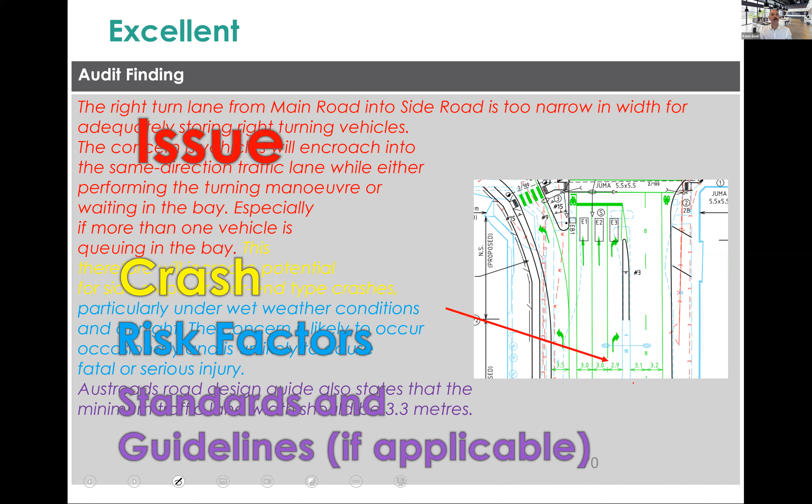Just summarizing here, a road safety audit is not another name for just a site inspection or a quick check of a design, or a black spot investigation. It's really not that opportunity to do detailed designing and redesign the project and work out all the issues. You're just flagging things and giving ideas. It's not a review against standards.

You don't use it to prioritize or rank project options. It's about taking one option and identifying the risks associated with that option. It's not a safe system assessment, although now a safe system audit incorporates a safe system assessment, so that's good. It's not a safety-in-design check. That's a whole different thing about whether it can be built safely, managed safely, maintained safely.

And road safety auditors, I do like them. They're problem finders - that's where we've got to be. Solving the problem is an added bonus and benefit.

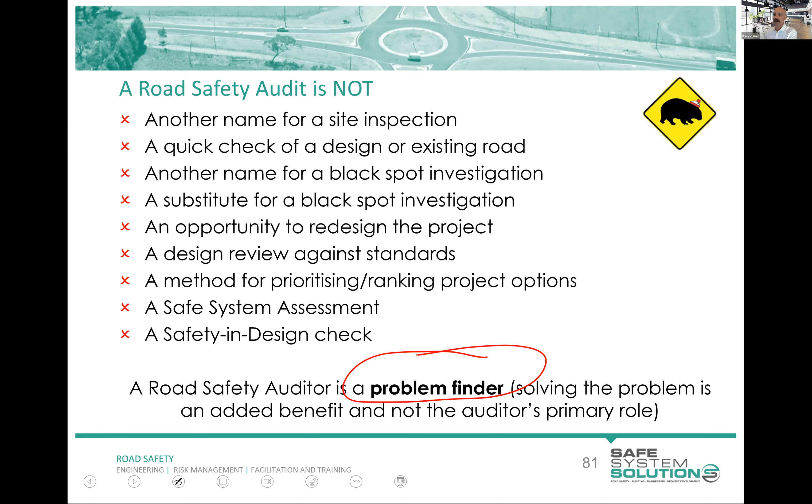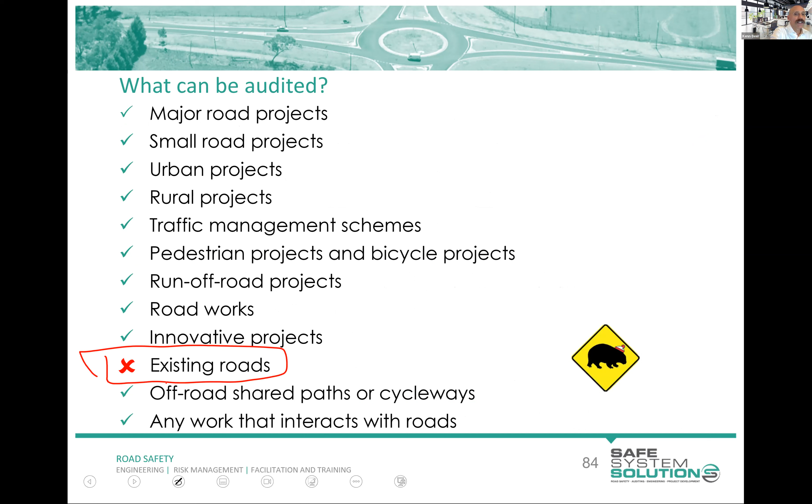We can audit all sorts of things: existing roads, designs, big projects, small projects, rural projects. In New Zealand, existing roads - it's not an audit, okay? But I did put existing roads because other jurisdictions do that, and you can take their certificate and go auditing in Europe or Asia or Australia, and you will do existing conditions roads.

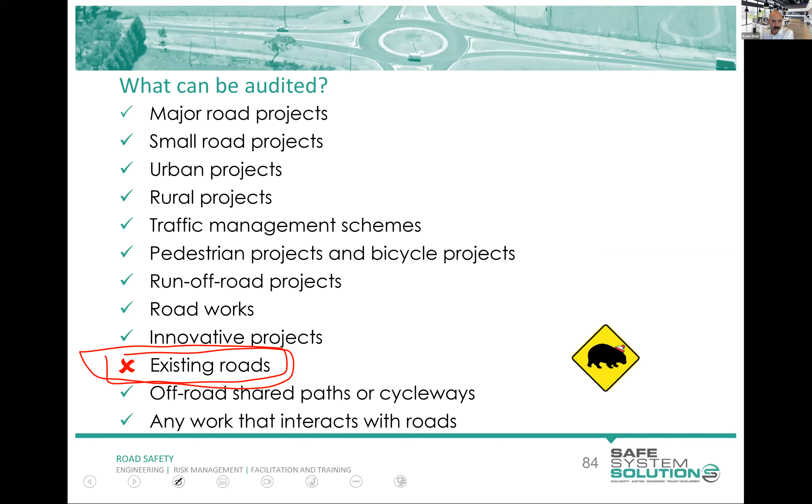The local government decided, we're improving things here, we're just making this all better, aren't we? We're sealing the road, so that's going to be great. We're putting some curb and channel down here. We're making this all good. We don't need to do a road safety audit because we're improving, we're going to improve things.

So without knowing this intersection and without giving you much more detail on it, just type into the chat - what do you think influenced the big increase in the number of people killed and seriously injured after this job was finished? We saw a big spike in community members being killed and seriously injured at this location. What do you think might have contributed to this?